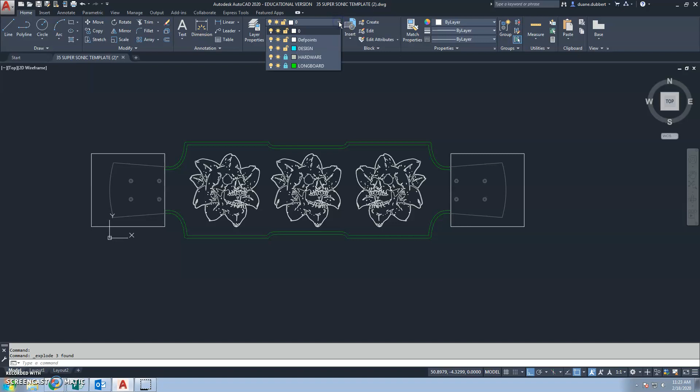Once you have that open, the first step is to unlock the hardware and longboard layers. The reason we want to unlock those is because we want to be able to modify them, and when they're locked we can't do anything to them.

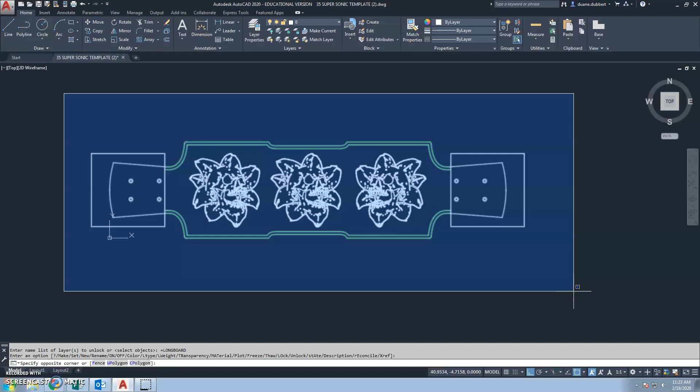Once the hardware and longboard layers are unlocked, left click and hold the mouse button down so you can put a window around the whole object. Once you have the window around it like this, release, and it will select everything.

We'll go back up and select layer 0, making sure this says by layer, so we want everything on layer 0.

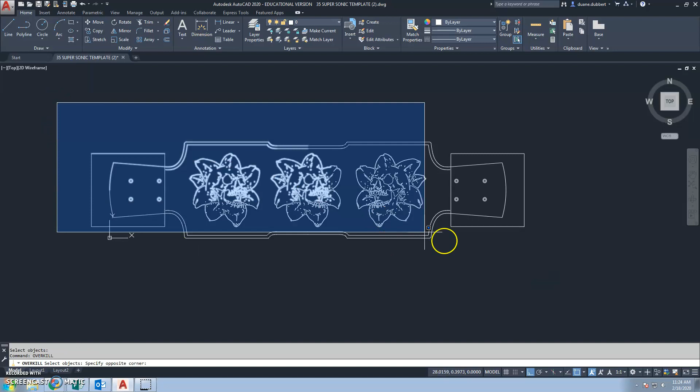I'm going to explode the design one more time, then type overkill one more time, put a window around it, hit enter, and click OK.

It says 8 overlapping entities, so I'm going to hit spacebar to bring me back into the overkill command, or I can type overkill and hit enter. I'll left click, hold down, release to select the whole thing, hit enter, and click OK.

Now I have 0 overlapping entities. I'm going to select it one last time just for good measure and make sure everything is on layer 0 and says by layer. Then I'll hit escape.

Now I'm ready to save this drawing. It's ready to bring into Mastercam. There are 3 ways I can save it.

I can type save as at the command prompt, which brings up the save as dialog box. I can go over to the red A and select save, which brings up the save as dialog box, or I can go to the little old style floppy disk with the pencil on it and click save as, which also brings up the save as dialog box. Any of those methods will work.

The first thing I'm going to do is give it a name. I'm going to call it Final Design. I'll put my caps lock on. I like to use caps when working with the computer, because it reads quicker.

I'm going to select desktop, and then the last thing I'm going to do is select AutoCAD 2013. The reason I'm selecting that is because our Mastercam 2018 can only import versions of AutoCAD as new as 2013, so I'm going to save my final design as 2013.

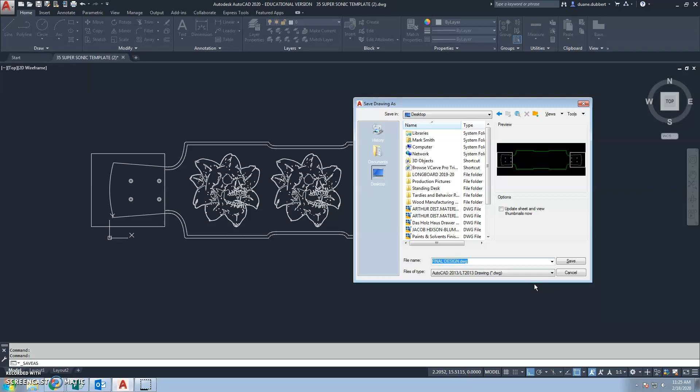So I'm going to click on save, and there it is. I'm now going to minimize that, and here it is right here. That's where I saved it to.

So the next thing I'm going to do is go over to weeks 7 and 8 of the Orientation to Technology folder, and click on the Mastercam Longboard folder.

I'll click on the 2018 folder, and then click on the file that is the type I'm building. The only ones we're building this year are the 35s, so I'm going to select the Supersonic 35. You might select the Slim Rider 35 or the Skater 35, but mine's the Supersonic 35.

So I'm going to right click on it, and left click on download. It's now downloading, and I'm going to click on that. I'll move this out of the way so you can see Mastercam opening.

This is a file that I have given you because it already has a toolpath in it set up. Setting up the toolpath and all those kinds of things is beyond the scope of this class. Now, how do we move around in Mastercam? It's different than in AutoCAD.

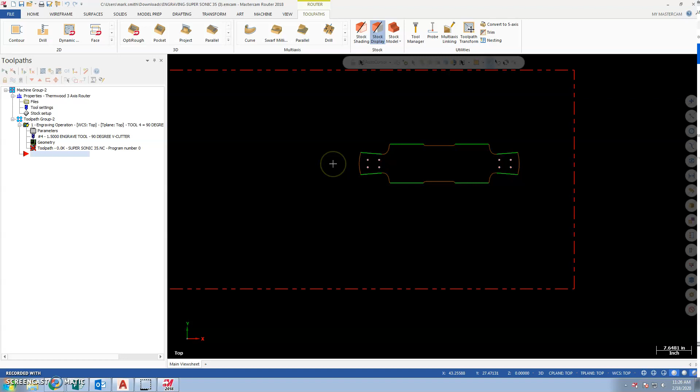The wheel will allow me to roll in and out, but I don't want to hold the wheel down to move the drawing around—that will not work. Instead, I have to use the left and right arrow keys, and the up and down arrow keys. So I'm going to roll in just like this.

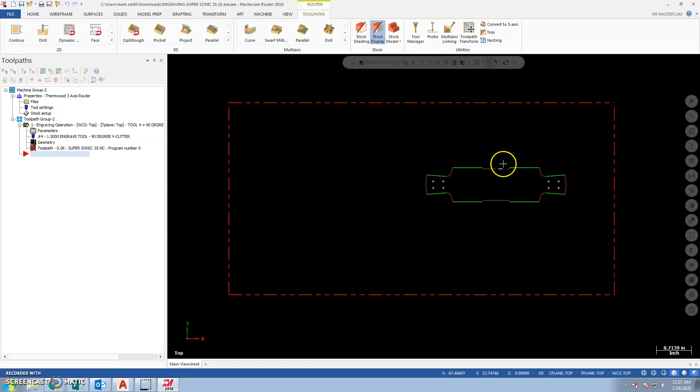The next step is to go to the word file and go to merge. We want to merge—we don't want to open a new file, because if we open a new file we'll lose all of this. So we want to bring a file into this file.

I'm going to click on desktop. Here's everything I have on desktop that it can see right now. Mastercam is going to default to looking for Mastercam files, but I want it to look for an AutoCAD file, so I'm going to select AutoCAD. Then I'm going to look for my final design, and here it is. I'm going to click Open.

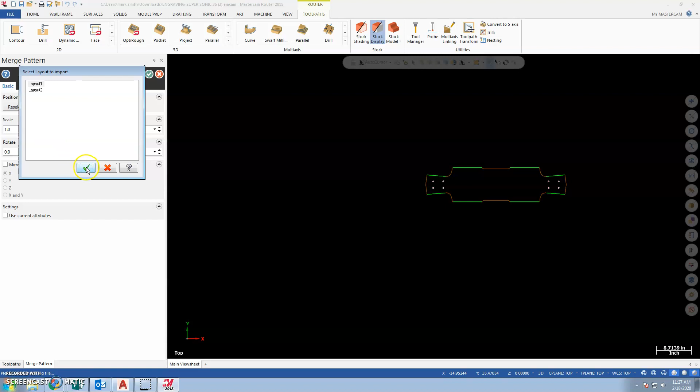You'll get the Select Layout to Import—just click the check mark. It will appear, and click the green check mark. So now we've brought our design into Mastercam.

So I'm rolling in and out with my wheel, and I'm using my arrow keys. I want to make it nice and big, just like this.

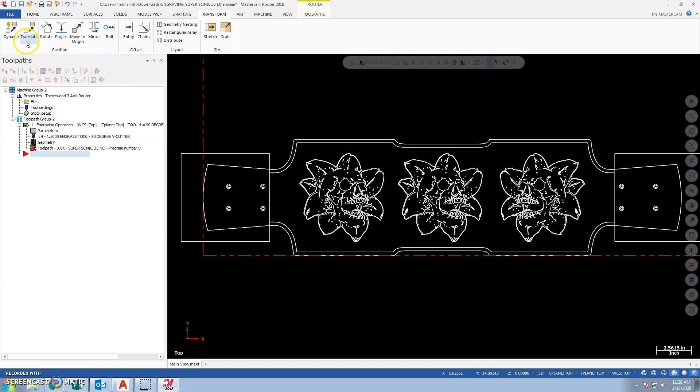Now we're going to move our design from the longboard we imported to the longboard that's in the actual file you opened. I'm going to go up to Transform—that's a word for change. I'm going to go to Translate, which is a word for move, so you can move or copy. Click on that.

Now it says select entities to translate or to move. So I'm going to go up here and select Polygon. Where did I find that? Right up here, Polygon. Then I'm going to begin clicking on my file.

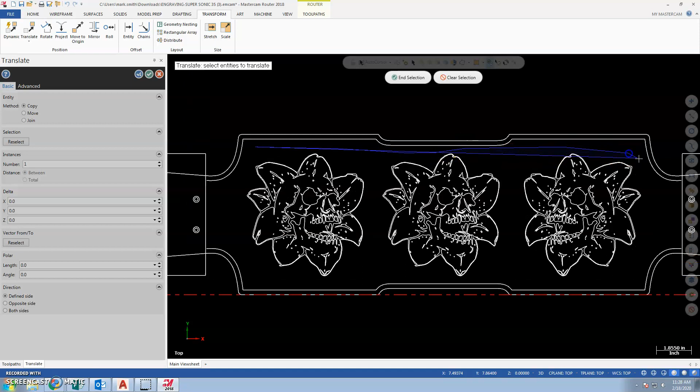If I need to roll in a little more to make sure I get all of my design without clicking on anything else, since some places it's pretty close, I can use my arrow key to move over, just like this. When I'm done, it doesn't matter—I just go up here and end selection, then roll back out. So I've ended my selection.

Now I'm going to go to the area—I have to end selection one more time, sorry, I have to hit it twice. So now I'm going to click on Move. I don't want to copy it, I just want to move it—I just want one instance of it.

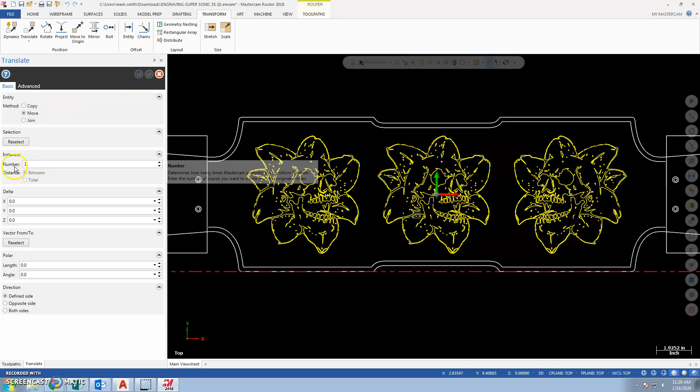I'm not going to move it mathematically—I'm going to move it by selecting points on the drawing. It says Vector From and To, so I'm going to click on that. Then it says Select Point to Translate From. I'm going to click this outside middle right there.

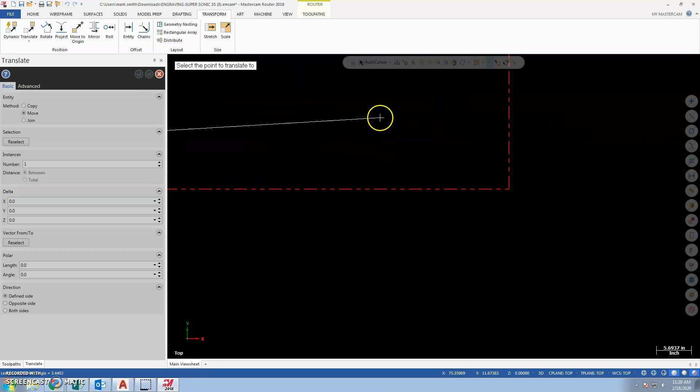Then I'm going to roll out, arrow over, roll back in, and click the same spot on the longboard where I'm moving it to, making sure I'm clicking its twin. Once it does that, the last thing to click is the green check mark. It's going to take a minute to think about it.

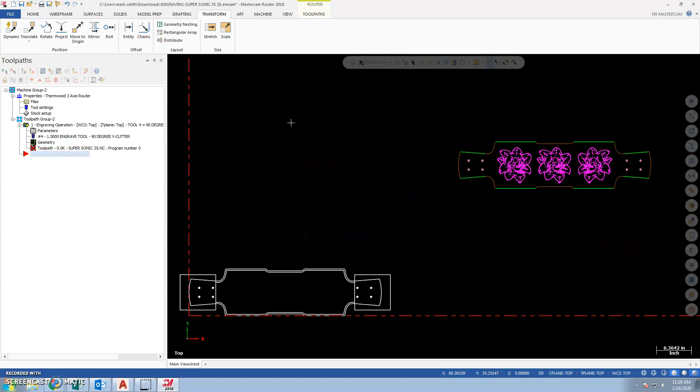Okay, it's done. I'm now going to arrow back and put a window around it by going back up here and selecting Window. Left click and hold down—that's the opposite of AutoCAD, though it might work like that in AutoCAD. Click again, hit Delete. Now I'm going to go back up to View.

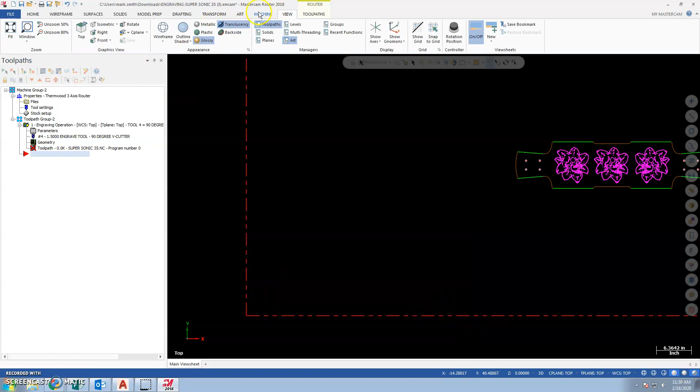I'm going to go to Fit—View, Fit. I'm going to go Home, and Clear Colors. So now I've brought my design in and put it on the longboard I supplied you with. The reason we're doing that is because the longboard I supplied you with is in the proper position to be cut on the CNC.

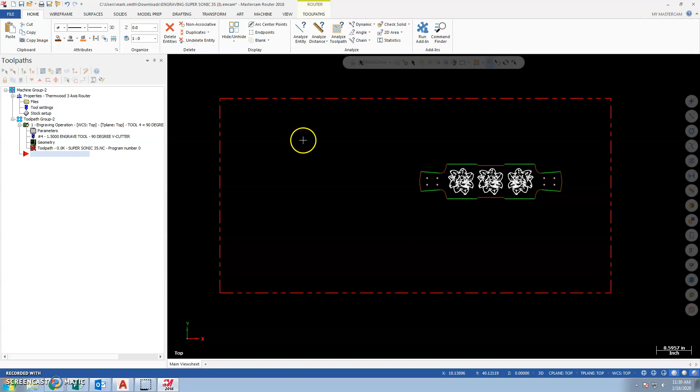So we have some seal path out on the CNC that's going to help hold your blank in place, and this is exactly where it is. So it's important we get your design moved to the longboard that is in the correct position, the longboard that comes with the file. The last step is we're going to go to Geometry.

We're going to click on the green icon, and go down to Polygon, just like we did earlier. I'm going to put a polygon around my design. Roll in if you need to, get as close as you need to.

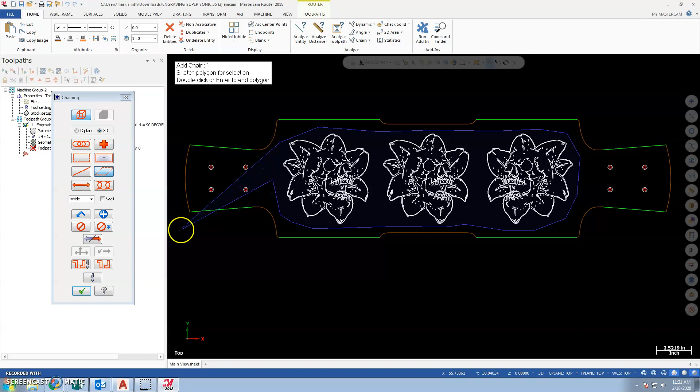Then I'm going to click OK. And then you can't see it, it's not telling you, but I have to go in and click anywhere on the design. Oh, did it not do it? Well, let's check one more time, let's do it one more time, around it one more time. I'm going to hit Enter. Oh, there we go, hit Enter.

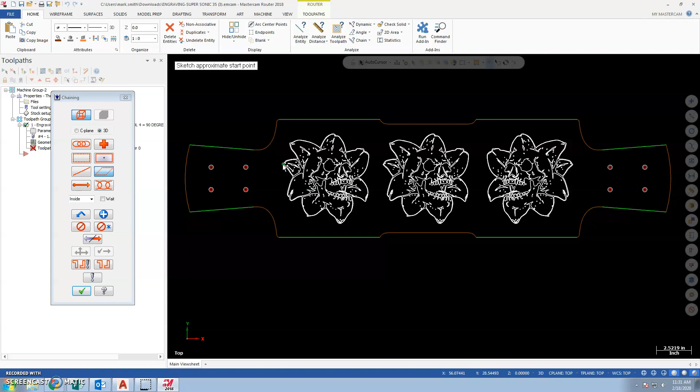And then it says Sketch Approximate Start Point. I forgot about hitting Enter. So I'm just going to click anywhere on it, it doesn't matter, so it's selected everything. Now I'm going to click OK.

So right now, see that X? That means this is a dirty toolpath, it means there's something wrong with it. And the only thing that's wrong with it is we've selected geometry and we haven't regenerated it. So with that check mark, I'll go up and click Regenerate All Operations.

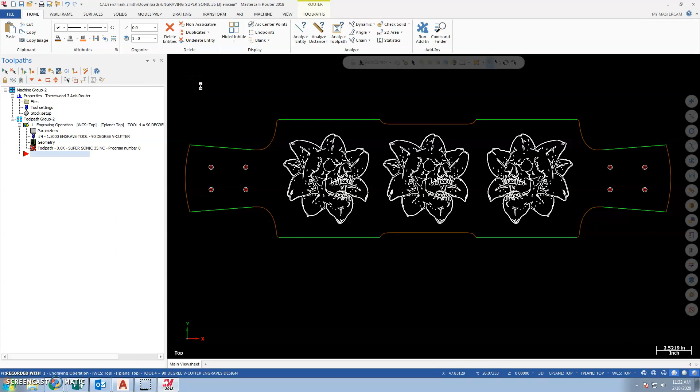So it's thinking. It's done. And so before I do anything else, I'm going to go Save As. I'm going to save out to the desktop. I'm going to call it Final Design. And click Save.

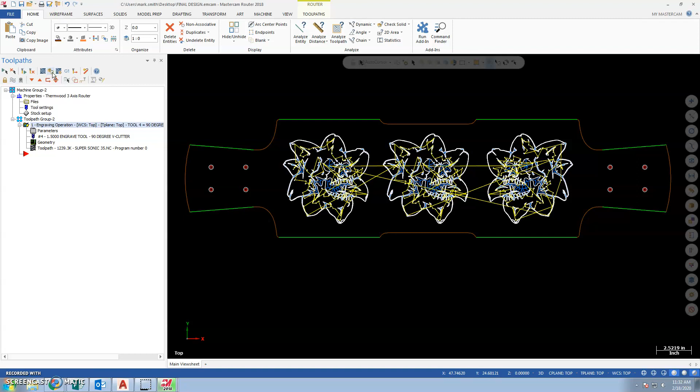Now I can go up here to Verify, and I'm going to watch and see what it's going to look like when you're cutting it on the CNC machine. So I'm going to maximize it.

Here it is. I'm going to do something special. I'm going to go to View, go to Isometric, turn it, and roll into it just like that. I'm going to go back to Home. I'm going to turn the tool off so I don't see it. And I'm going to turn the precision all the way up. I'm going to click Start.

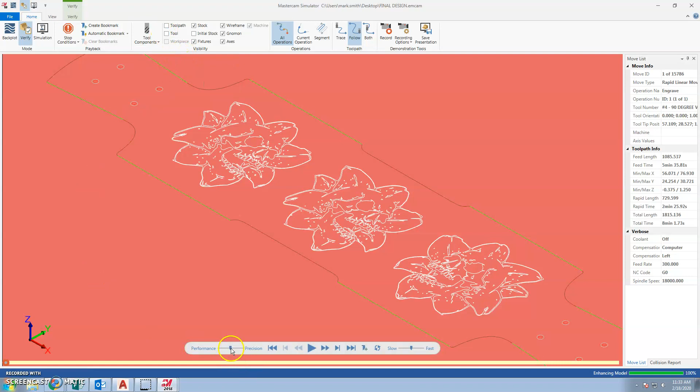Now, the video cards in our computers aren't fantastic, so they don't work great, but they give you an idea of what it looks like. It'll be close. So let's just roll into this, and it's going to take a minute for it to think, and all these multicolored areas will clear up once it's done thinking. So we'll just let it sit there for a minute. It's doing all the calculations in the background, it's catching up, it's too much for it to do all at once.

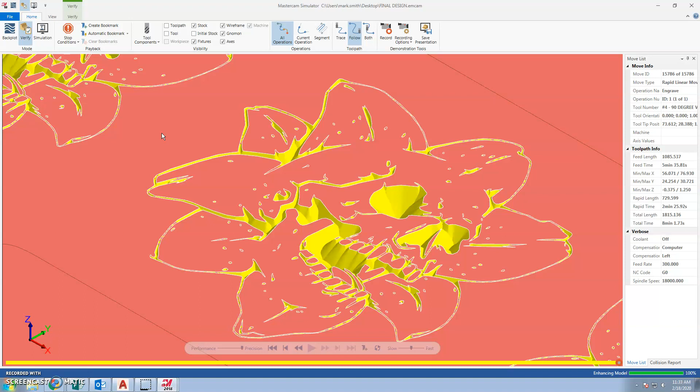But once it's all done, everywhere it cut will be totally yellow, and everywhere it didn't will be that salmon color. I don't know how long it'll take to happen, I'm not going to wait if it takes much longer. You just know that if you want to see it really nice, you'll have to wait a second for it to clear up, so it's always going to take longer than I want to wait.

So I'm just going to click Close. I'm going to go back to View, go back to Top, go back to Fit. And now my drawing is totally done. It's ready to go out on the CNC.

And so I'm going to go File, Save As, to the desktop, Final Design, save it. And then the last step is you need to email your file to me, to the email address that's on the board behind the teacher's desk. And that is it.